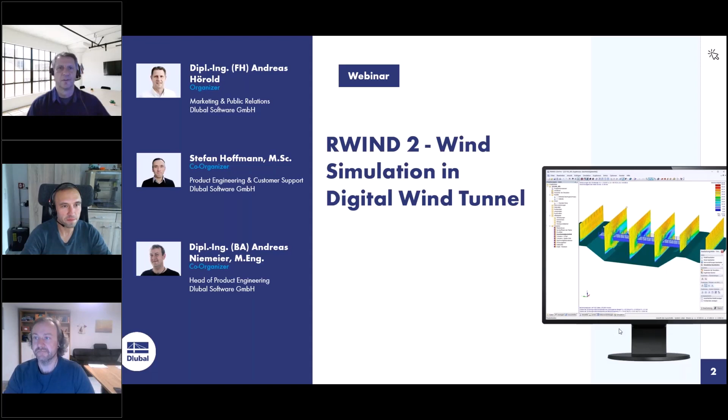Okay. There were some interruptions, but we could hear you. Okay, then we can switch off our webcams so that the attendees can see the full screen.

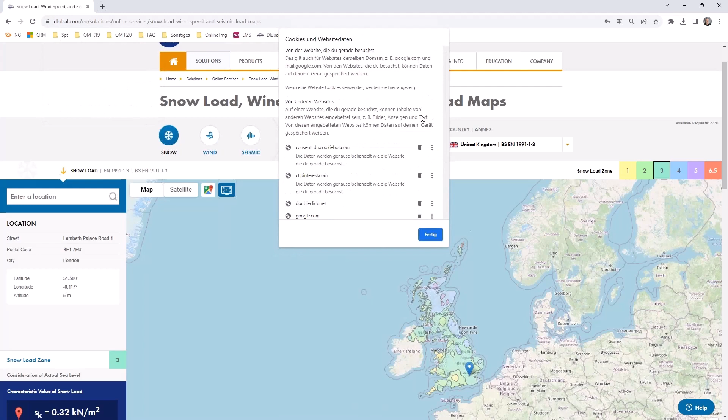So this is of course some data which is saved on the computer to quickly access a page, but it might be necessary to reload it. And then you can select if you want to allow all cookies again. And then the frame should load again for you if it did not do before.

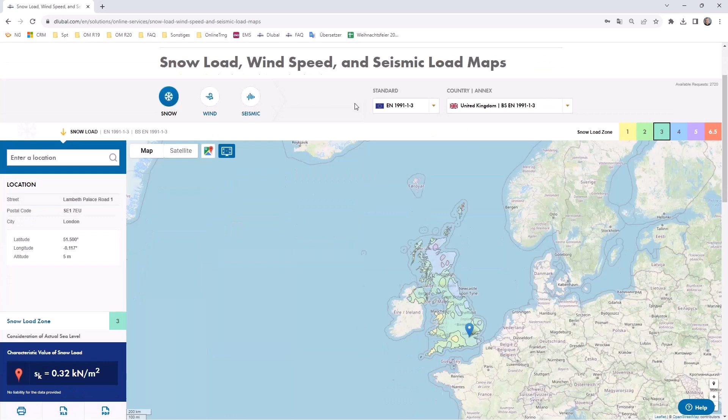So let me quickly sign in so that I will have enough requests for today. And let's go again to the snow load map. So I think you're already coming to it. So it is not available yet for every map. So I do not think that it is available for Great Britain. Oh, it is already. In my tests, it was not available. Okay, so we can use, for example, Great Britain with the Eurocode 1991-1-4.

And then you see the small button on the left bottom of the page, which is of course still announced as being a beta. So please double check the values if they are correct or not. You can of course do that in RFEM, or at least be suspicious if they might be correct. It's still in a beta mode, but we do not want to not present it. So you can think about using them.

So if you once click on the button, you can already see the three diagrams you can now gain. So it's not only about the basic wind speed. No, you directly jump into the map and parameters according to the Eurocode, and it will create the diagram over a certain structure height. So if you would adjust it over 20 meters in here, you would see that the diagram will of course be adjusted. And you can of course as well jump into the wind profile tab in order to copy paste the values with the level.

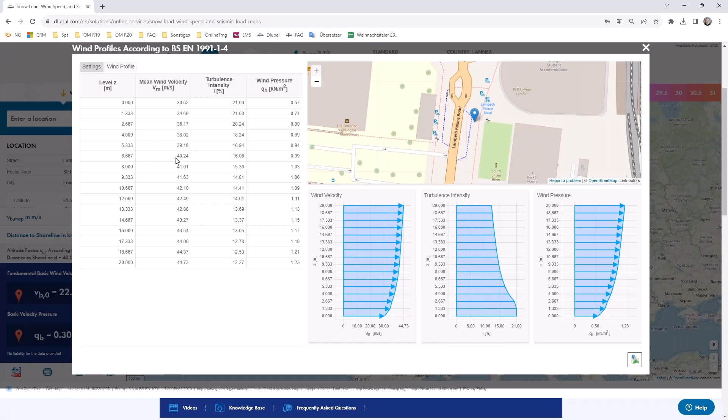What is then of course necessary if you jump into the RWIND main program for the definition of the wind profile and turbulence intensity profile. You can as well choose that you want to have a user-defined definition and adjust all the values you see in here. You also get a closer look on the place where you are. You can also switch off the map if you rather want only a big display of the diagrams.

So just once to remind you again, it's still in a beta phase, so it might not be available for every standard we provide, but this might be quite useful for you if you use RWIND without RFEM 6, or if you want to compare your hand calculations, or if you want to compare our calculations and tell us something might be wrong or not.

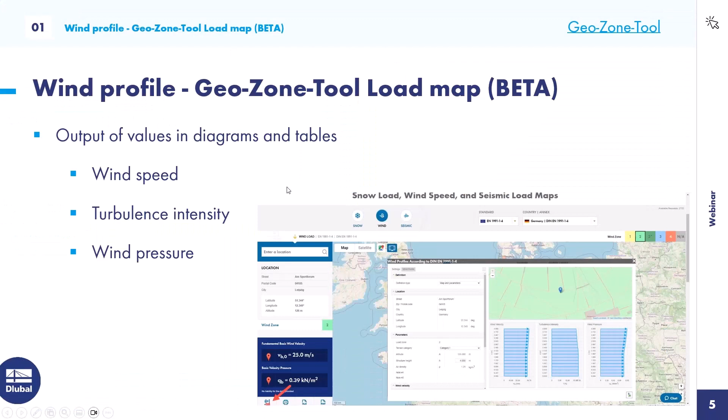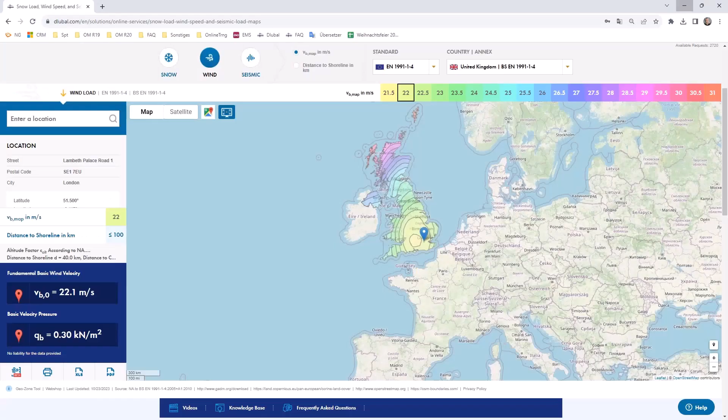So this was something not directly linked to RWIND. So let's now jump into the main part, of course, our program RWIND. And this is my summary of the 4 features I would like to mention. Maybe you are not yet used to it, but you can also find all the data in our extranet. So if you log in with your account and you go into the development tab on this page, you can see features and also bugs. And this is most likely the place where you can inform yourself of what is new or what was fixed.

And if you then restrict it to RWIND, this is in German, depending on the language which is set in your account, you can see that these features were introduced into the 4th version or the 3rd version and so on. And you could also check the bugs which were fixed for the certain files.

So what I would like to talk about now is the first feature, the generation of zones from RFEM surface numbers. The next one will be the support for verification or experimental data. This will be the main part of today's webinar. The next one is a new scaling function for the wind tunnel optimization. And last but not least, we will quickly step into the display of maximum and minimum values in each time step. I have, of course, one slide for each feature, and then we jump into a small file in order to check where you can find it.

So you are now able to generate zones directly from RFEM surface numbers. Of course, only if you use RFEM 6 and then hand over the model to RWIND. We will now also hand over the surface numbering, and then you are able in the edit part of RWIND to generate zones from surface numbers. So each surface, which you can of course split as much as you want in the RFEM main model, will create a zone.

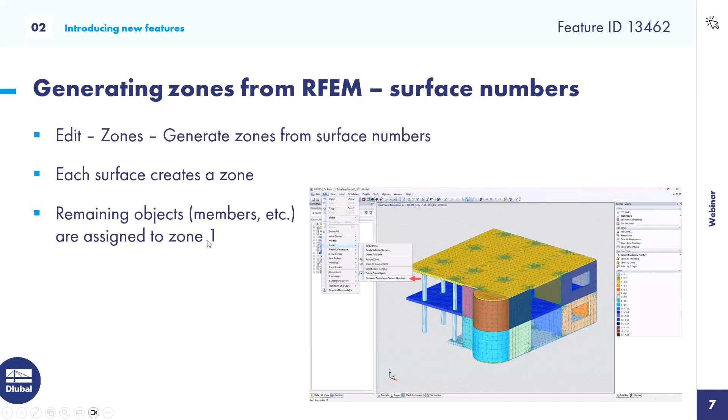And remaining objects, so you may of course also hand over members, they will also have triangles. They will be assigned to zone 1. So of course that's a bit of a complication that they are assigned to zone 1.

But if we now step into my example file, what is also installed, it's the concrete building where I switched on the surface numbers. You can see that we have a surface number 1. And if you do not want that 1 also includes the member triangles, you just have to once go into the table and insert a row. So the surfaces will not start with 1, and all other things should be synchronized in the back.

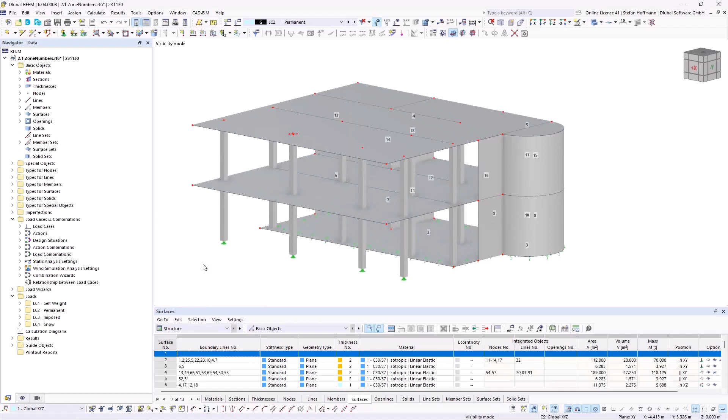And now we have only surface numbers starting by 2, and all other stuff may be handed over to zone 1. If this is not fine enough for your difference, we will also see it in the main example later on. You might also right-click and divide surfaces with intersecting lines in order to create multiple or more zones.

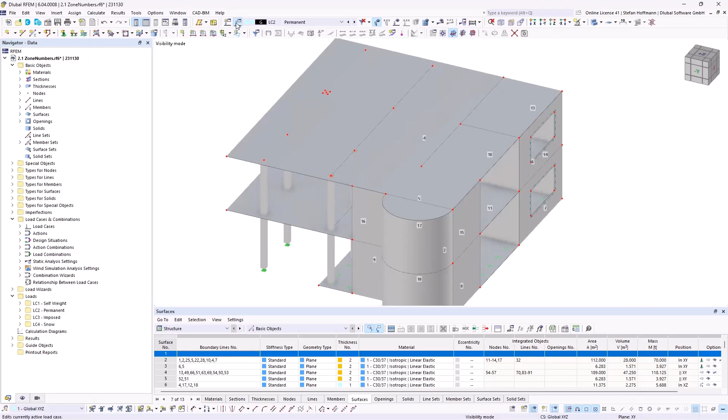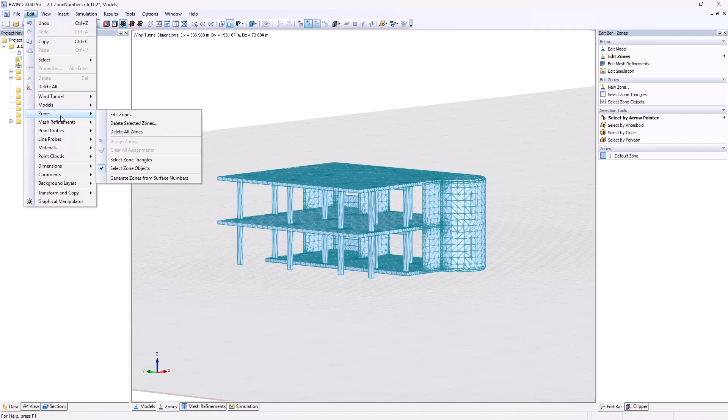So let's quickly create an example wind simulation load case. We will not care about any settings that are necessary to be taken. We will just open our model in RWIND, which can be quickly done by the button I used. So our geometry is handed over, and now there would be only one default zone. So it is possible for you now to hit Edit, Zones, and generate zones from surface numbers.

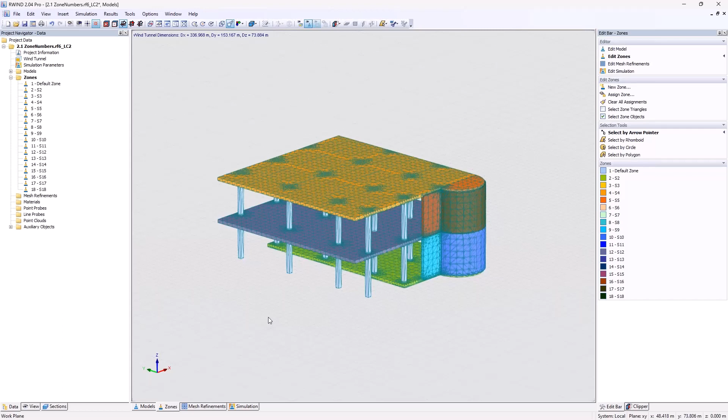So you quickly see that there are now a lot of zones created, and you do not have to do that manually. So you don't have to create a new zone and use the selection tools to gather all the triangles which might be necessary for your file. No, if you already consider the surface numbers or a certain division in RFEM 6, you can already directly create these zones in order to quickly evaluate maybe normalized pressure over a certain zone.

I will later on show you how we will use it on our monopitch roof. And as told, you can see that there's of course also the default zone number 1, where you will then be able to find every other stuff which is not related to a surface number. Okay, so this was the first feature I wanted to talk about. We will use it later on in the next example. So let's close everything, go back to my presentation.

So the next one is the support for verification and experimental data. So we now offer you the possibility to enter verification data into the table. This is yet linked to point probes and pressure values that you can enter. And you can then display the data in graphs using labels, so the normal point probe labels. But you can also do a graphical representation of the differences between the verification data and the simulation results. You can switch that in the result navigator.

You can also choose the extrapolation of the data on the surfaces in RWIND using 2 methods, which are explained in the manual. And you can also restrict the verification data to be extrapolated to a certain zone. And we will later on use that, of course, in my main model.

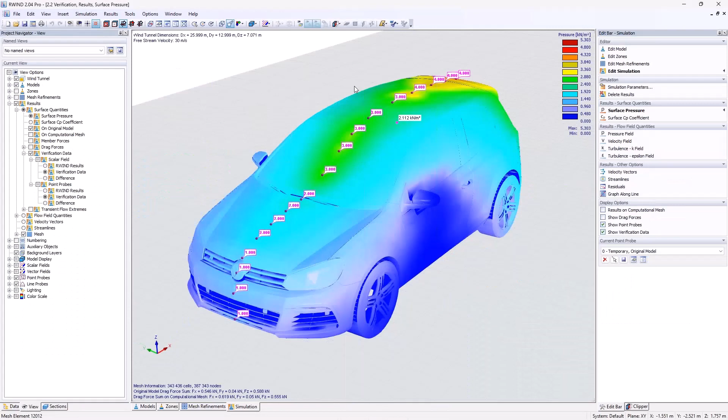But in order to introduce the verification data first, I use the Volkswagen Golf, which is an example installed already if you install RWIND. And then I have already defined a point probe. I activated the option for the point probe. It might be, of course, a bunch of probes you want to enter if you want to define certain values for zones. We now only did 1 point probe.

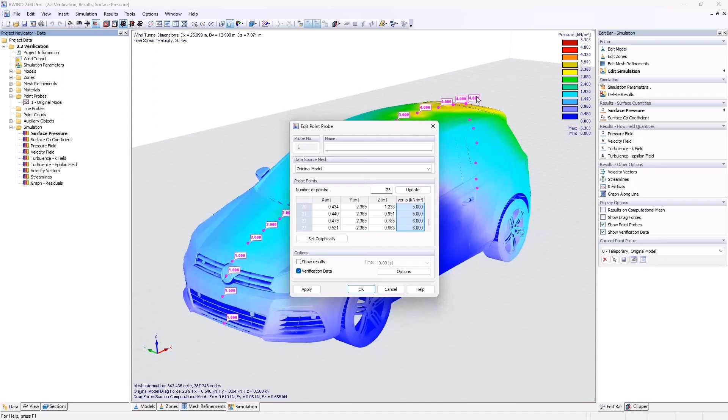And if you activate the verification data, you will get one more table over here where I have entered random values. So they do not come from any tests. I just wanted to show you the labels so that you can quickly estimate where they are and what they are doing. So then you will also be able to adjust the verification data options.

So you can choose the interpolation method, which is yet fixed to all point probes. So you cannot yet differ between Gaussian interpolation or diffusion, but you may set a different data range constraint for certain zones. We will see that later on in the other example. So if you do not know about Gaussian interpolation or diffusion, you can just hit F1 on the keyboard. And usually it should be linked, but maybe we did not yet do this.

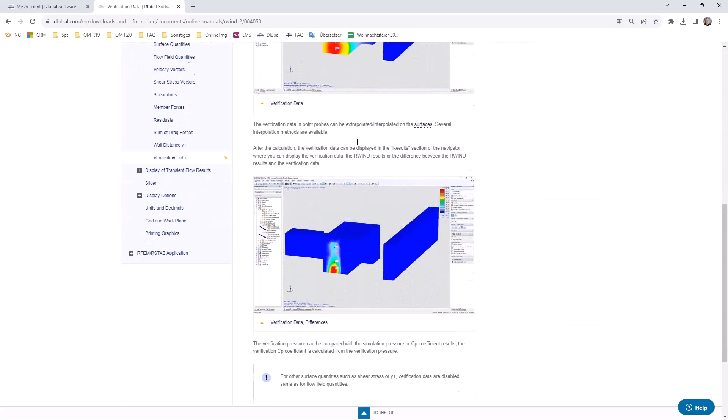So you can quickly, of course, search for verification, wait some seconds, do not wonder if you do not need to hit enter, and then choose the topic, which may be about verification data. So there is some general part of it. And if you go into the probes, we quickly search it, then you can see the explanation about both interpolation methods. So just scroll down and then you will find the information about the second interpolation method, or I think also about the other ones.

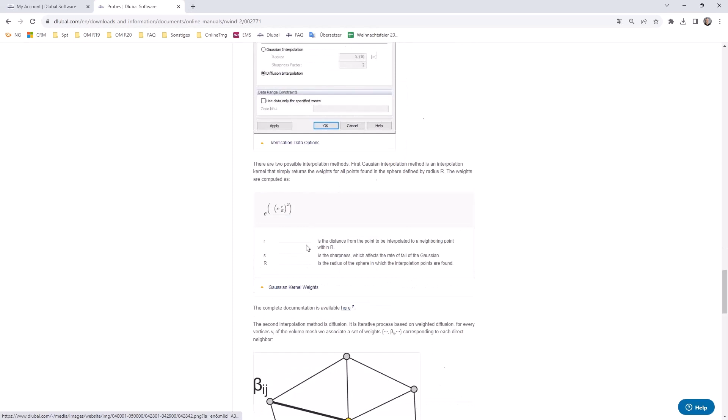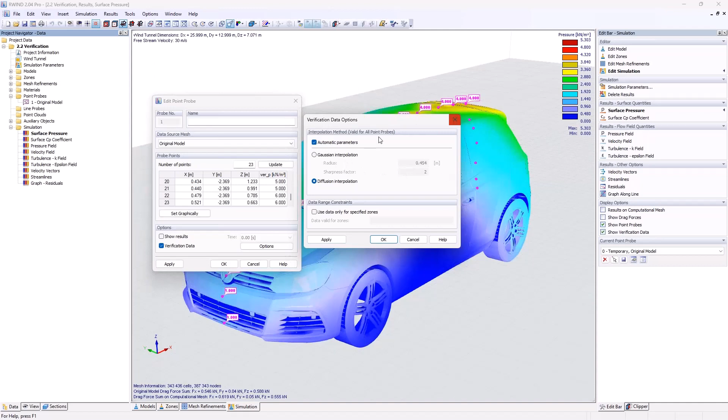Yeah, so we will not go into the theory behind it now. You can double check it if you are interested later on. What I do remember by myself is that this will most likely diffuse interpolate about a whole area in slides. And with the Gaussian, you can set a radius which will interpolate, but we will once again, of course, later on show that.

And if you have these results, you can always differ between the verification data of the scalar fields and the point probes. So you can step over and show the results you get from the numerical wind tunnel analysis. And then you can, of course, also switch to the verification data. And I think the biggest influence will be the difference. So you can directly check according to the colors how far our calculation maybe is away from the standard, which does not really mean that it must be far away from the reality.

So there's, of course, always the question, how can we verify our model? So from my proposal, every FEA analysis or also CFD analysis needs to be, of course, verified by a wind tunnel experiment. And then you can enter the data and check if the assumptions you make in this complex CFD analysis match with reality. All right, so we will later on use that feature, of course, once again.

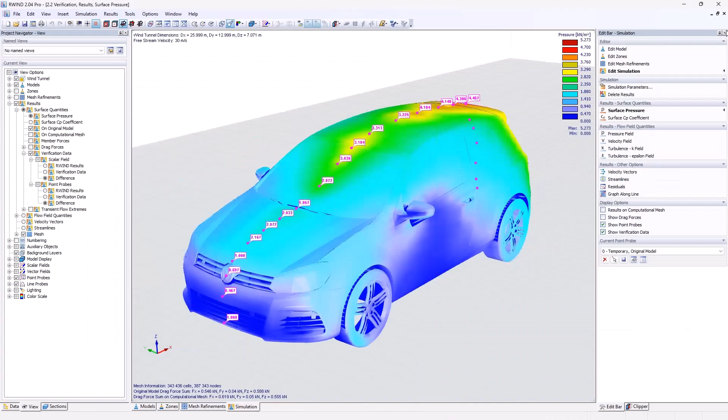So the next part is the new scaling function for the wind tunnel optimization. So you are now able to define scaling factors to automatically adjust the dimensions of the tunnel, and you will be able to save the user-defined scaling factors. So let's quickly jump into the example, which is once again the Volkswagen Golf car. And then you usually double click on the wind tunnel. So let's zoom out a bit maybe, and see these automatically adjusted values.

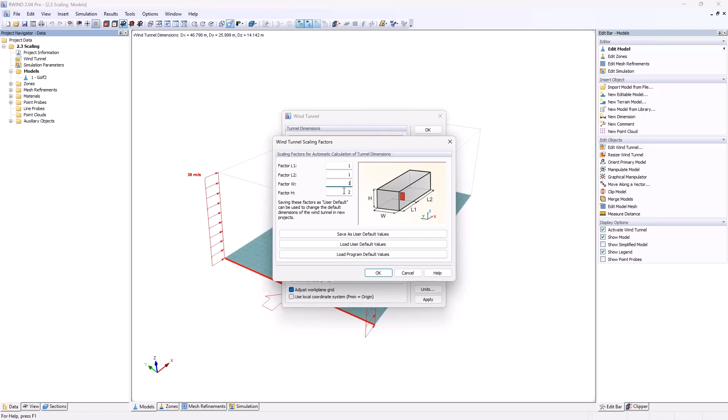And then there is a button of the scaling factors where you can now define your own values. Usually it is like this. So it is multiplied then with the normal values you have in the program. So this is the wind tunnel the program will offer you. But we propose most likely, if it's going into a more detailed calculation, a recommended wind tunnel size.

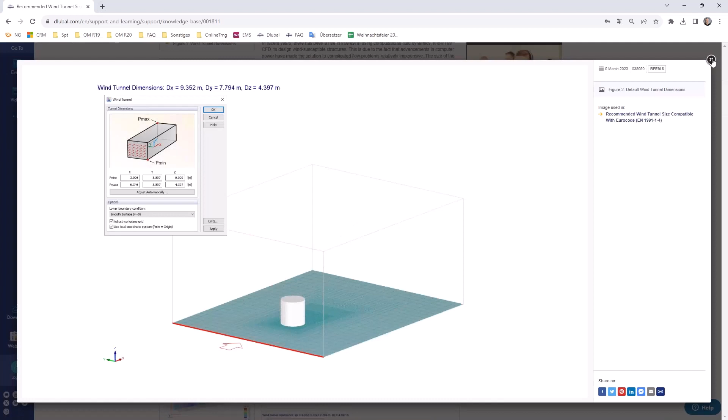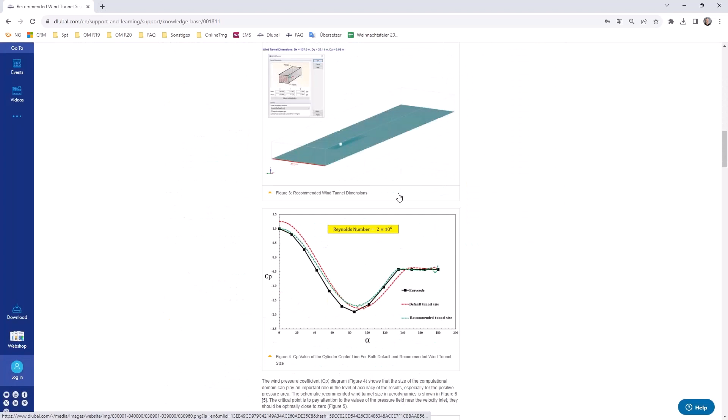I did already once mention this technical article by Mr. Kazemian in a different webinar, but I would like to once again put some effort into it, that it is quite necessary to think about the dimensions. So if you compare the standard dimensions to have a quick estimate of the wind load pressure and the size we would recommend, which is of course then extending the calculation time a lot, if you want to compare values to the Eurocode, you can see that the size will be much bigger. And I did, of course, a quick estimation of what the values should then look like.

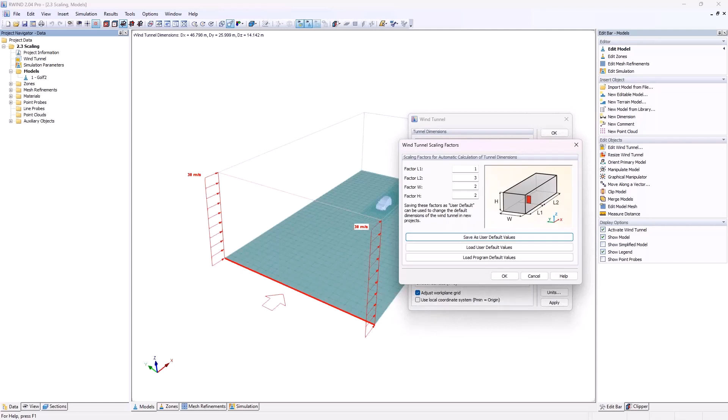So if you would like to match the technical article, I do not like numbers with comma, so it would be 2.7 in this length, 1.6 in this direction, and 1.85 in this direction. I would use 1, 3, 2, and 2, hit OK. Then you will be informed that these are just the factors used, and you have to use, of course, the adjust automatically button once. If you then hit OK, you can see, well, it did not change a lot because I think it was already bigger in front.

But then your wind tunnel will be adjusted according to the factors you enter in here. So if you put 10 inside it, say OK, and adjust it, then you can see that this factor is going to be increased a lot. And then this will offer you the possibility to not think a lot about meter values, but to quickly enter the factors you would like to use, save them, load them, and apply them on your model.

So the last feature I would like to present today is the display of the maximum and minimum values in each time step. So this means it is for the transient calculation, limited to our RWIND 2 Pro version. And it will offer you to have some kind of envelope for surface pressure or CP coefficient values.

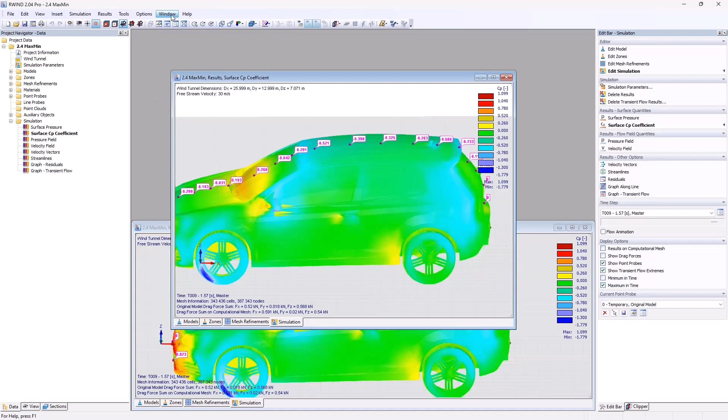So let's jump once again to the golf car. There's also a transient calculation file for the golf car. So usually if you show the transient flow results, you will have a slider over the time where we can see, most likely on the back part of the car, that the pressure will of course change over time due to the wind acting turbulently. And then it would be kind of hard to evaluate where will be the maximum suction or the maximum pressure.

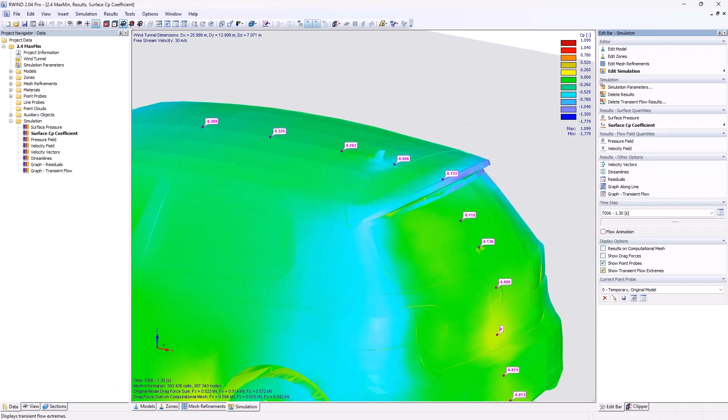Or if you are lazy and you don't want to check that, you will now be offered to show the transient flow extremes. And if we use 2 monitors, we can show the minimum in time, which might be minus 0.814. So it's of course the minimum with a minus. And we can then also choose to show the maximum in time.

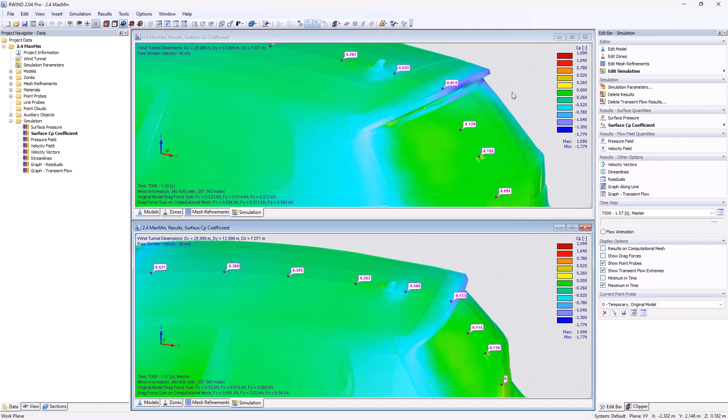So this same point probe would be, in a transient calculation over time, gaining the values of minus 0.733 or minus 0.814. So this is one way to determine the maximum or minimum values for your structure or your file. You can, of course, also switch that value in the view navigator, but I think the quickest way is, of course, to do it on the right.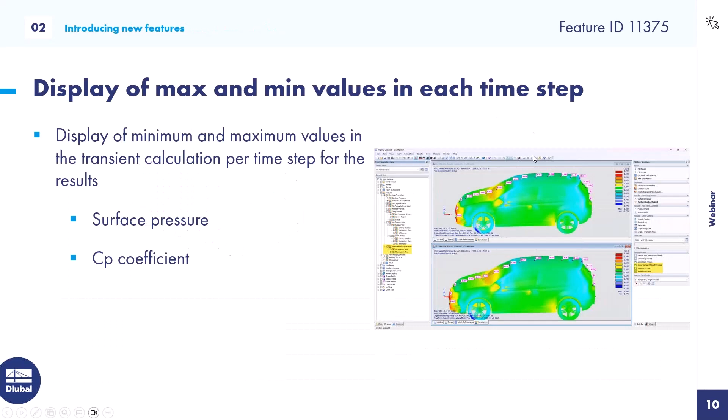Okay, so this was kind of a slide presentation, but was also stepping into the program. And now I would like to show you how we can use the feature of the verification data on an example. So it's a building, it's 10 meters long, 8 meters wide, 4 meters high, and it has a roof angle of about 5 degrees. So it's a monopitch roof. And we will apply the zones for a monopitch roof.

If the wind is going into the main X direction, there will be 3 zones: the F zone, G zone, and H zone according to the Eurocode. And it will be divided into these parts. So we will use the generate zone function in our model, and we should get these zone dimensions. I have taken them from the wind load assistant because this is a known example type of roof for the Eurocode, and it is supposed to have these pressures on the certain zones.

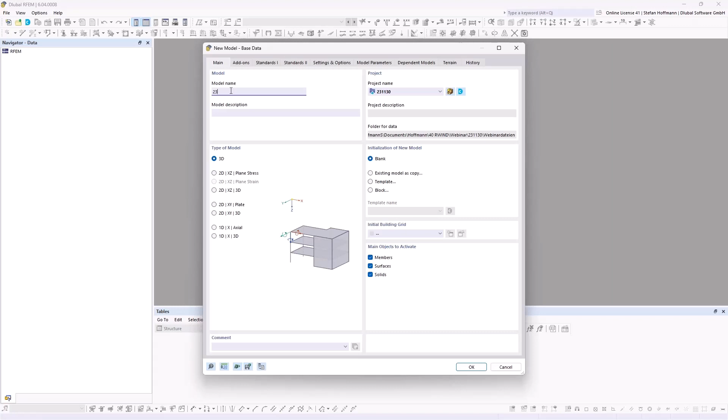So we will start with a fresh model in RFEM 6. So let's give it a name. It's the name of today, and it's called monopitch. We will not do any design of elements. It's really just about giving our model to the wind simulation analysis and gaining the pressures. So I will only activate wind simulation. I could activate all because I'm working for Dlubal, so I'm not limited to any add-on.

And we will do it according to the German national annex, because we are quite used to doing so, and we also tend to present our English webinar for the German annex. What you can also do now is choose a location in the Geo-Zone tool if you want to. We will do that later on. And you could also define a terrain. Just remember, it is possible, but since we would not like to have any influence by neighborhood or by the terrain, we just skip that.

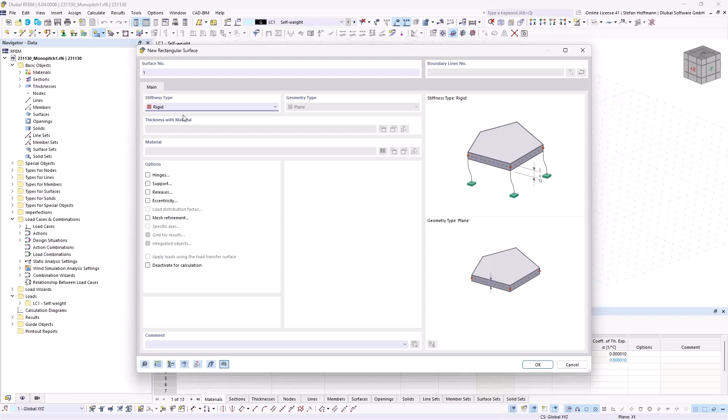So once the file is loaded with all the data, remember that the first angle of wind simulation load is going into the global X direction. So I tend to rotate my model because I dislike rotating the wind load. And I will now start by modeling the bottom plate. I will simply use the rigid type, because I'm only interested in the wind load on the structure, not in any design yet. So it does not matter if it's concrete or metal. We can just use rigid because I do not account for any stiffness.

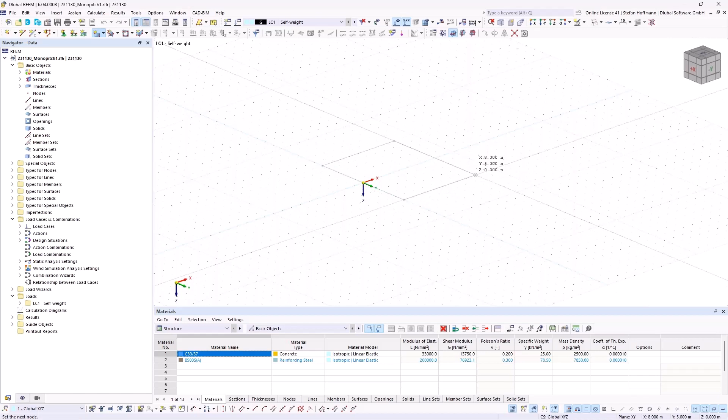So I said that it is 10 meters times 8 meters. So we now need to define this size in our program. So where did I choose it? I'm starting at minus 5, and we're going to 5 and 8. So this will be the bottom plate.

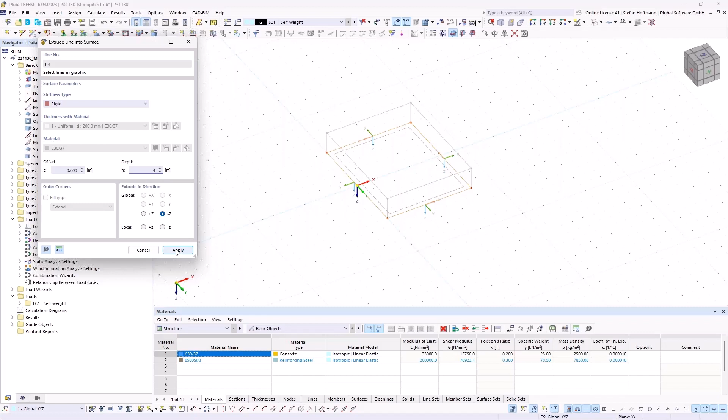Then we can simply, with the control key on the keyboard, mark all the lines, right click on them, and extrude them into surfaces. This will offer you the possibility to quickly model a surface. We will once again use the rigid type, and the height should be 4 meters into minus z. We apply that, so we most likely have already our hull.

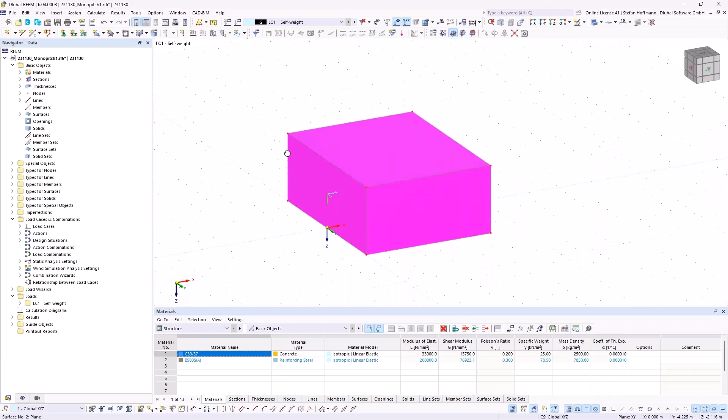You can, of course, switch into this display if you like it even more. Then I would just mark my bottom surface and copy paste it with the control keyboard and snap it to the top. We, of course, need some boundary conditions at least, so I would just apply some line supports, being some singular foundation on the length. And then it's, of course, about defining the angle.

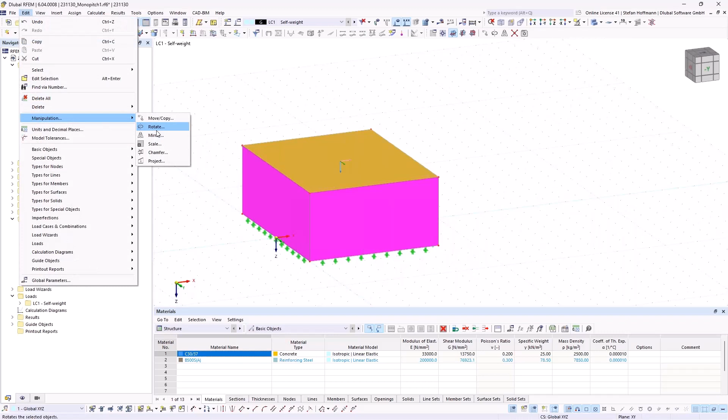You can quickly do that by simply hitting the surface and using the manipulation tool to rotate it. So you can now decide that you want to rotate it, for example, 5 degrees. Due to our wind load assistant, I use 5.01. And then we need, of course, to think about what will be the direction.

So it is about our y-axis. This is the turning point, and it should be into the z direction, so we want to have it into the global z direction. Since we use this point already, you don't need to choose it, but we can, of course, once choose a node in here. And if we hit OK, it is moved. Since I only selected the surface, all other combined elements are not moved.

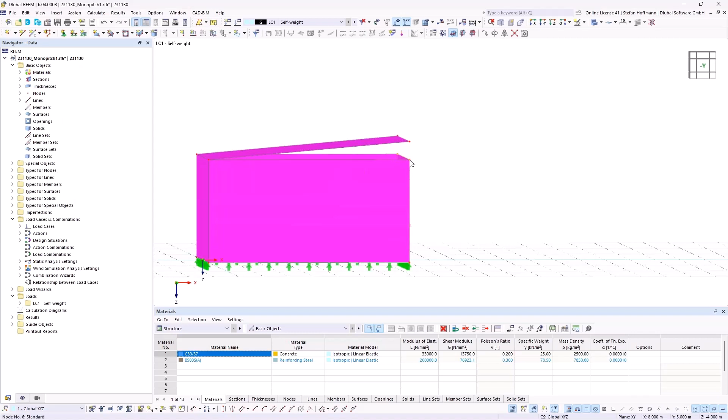So we could simply mark everything before, or we now just mark both nodes and drag and drop them to this position. Then you can see that the surfaces are quickly adjusted. It's quite smart. If you would like to model close to a CAD design, I think you can use drag and drop and so on.

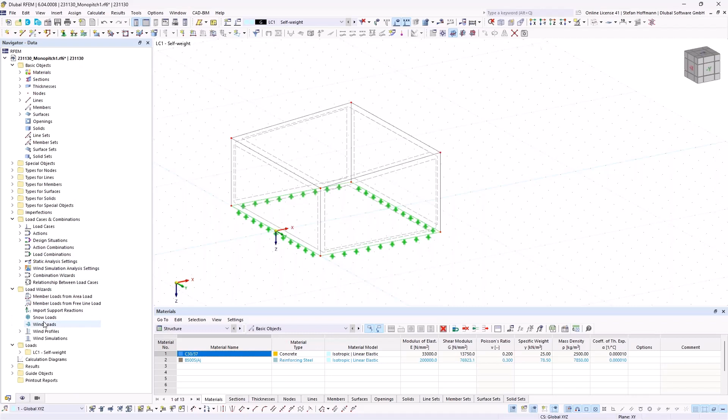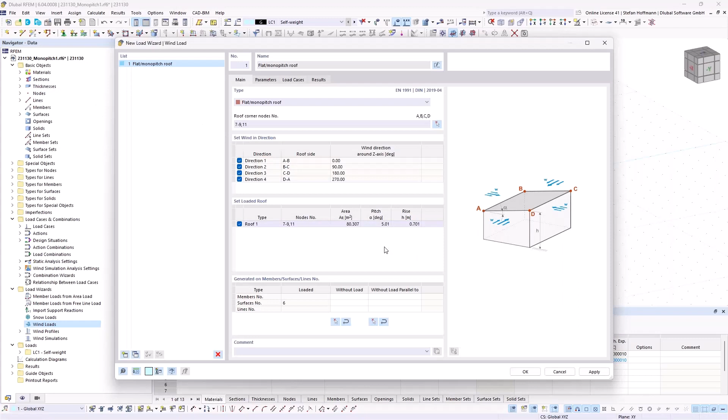And then you see the picture, what 4 corner nodes you need to choose. So we simply pick our 4 corner nodes and hit OK. And then we introduce the parameters.

So now I hit the button to jump into the Geo-Zone tool, and I will use the location of Leipzig. It does not matter where we are. You can see that the German standard will choose the wind zone 2. I will load all the data. It will gather all information from the Geo-Zone tool, so we do not need to enter it manually.

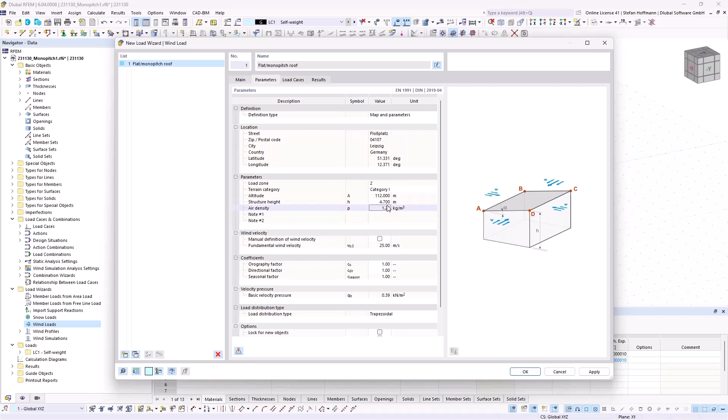And then I can adjust the structure height, which is roughly 4.7 meters, and we will use terrain category 2. If we do that and create all the wind load cases, we can quickly estimate the results already. So you see the load directions and you see that our zones will be split.

So if we jump quickly back into this part, we will be given all the data that the standard will give us. So the width of zone F, so E divided by 4, is 2.35 meters, and E divided by 10 is 94 centimeters. So you will be given this information.

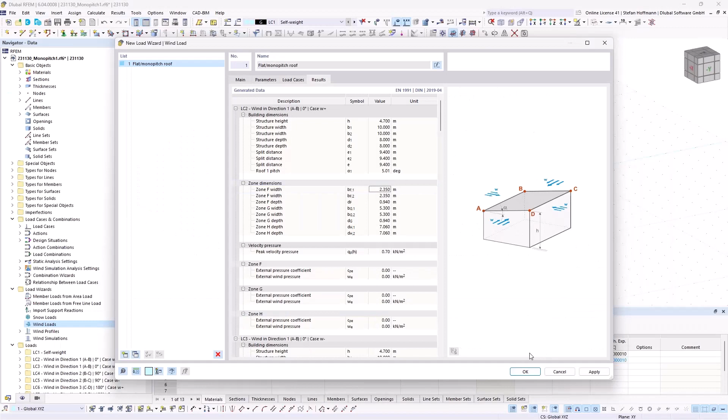This is why we do it as well shortly with the load assistant. And if you display it, you can see that this is the load, or the suction, we are going to experience in our wind, and we will then check it.

So let's continue. What we now want to do is define our zones, so we would like to split the roof into parts. For that, we would like to have our lines showing into the same direction. So now we can use both lines, hit the right mouse button, and divide the line via distance.

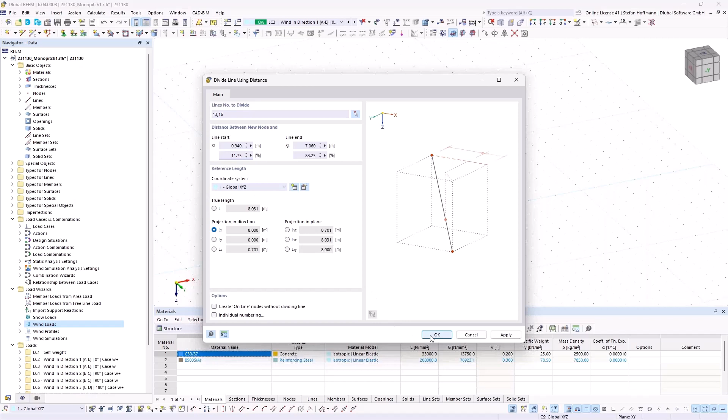So now we could just simply enter 94 centimeters, but it is meant as a projection showing from top. So you are now able, of course, also to use the projection of the line into the global X direction. You can enter 94 centimeters in here, and if you do that and hit OK, you can quickly divide the line using it for further modeling.

We will now simply draw a line into here and have the line which is going through, and then I told that the distance will be 2.35 meters.

So we will use this line and also divide it with a distance. It's not about the projection or anything, since it's the same if we use it, and split the line at 2.35 meters. We will also divide the line at the distance at the end, 2.35 meters. Okay, so now we can simply mark this node and copy it from this point to this point.

Or you can, of course, also try to hit the tool in order to snap the perpendicular part. I'm not sure if I activated it. So I just simply use, for example, also this line and copy paste it over here.

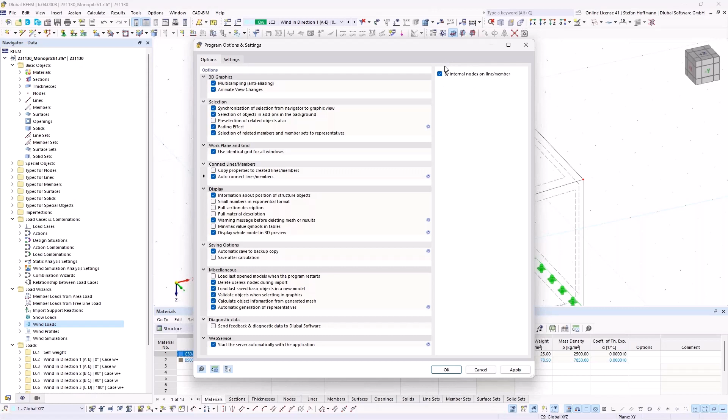If you are curious why maybe there are red nodes or blue nodes created, so if the line divides or not, you can step into the program options and choose the setting for what it is supposed to connect, members or lines. If you do not manage to do so, you can simply later on use this function and check if the lines will be divided.

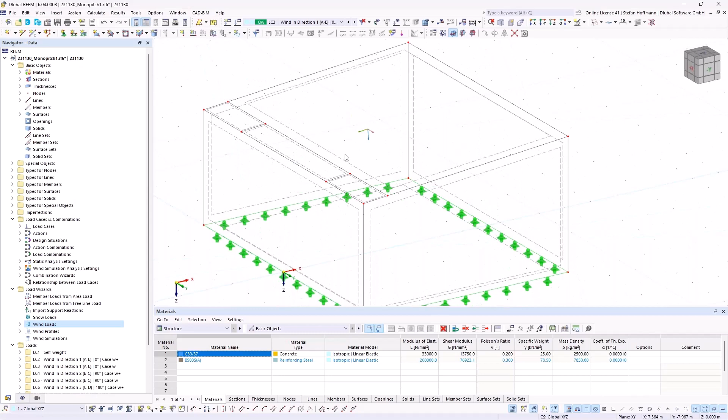So the last part we need to do in order to have certain surfaces is to right-click on the roof and divide the surface with intersecting lines. And voila, we now have 4 surfaces for the top, which will give us 4 zones as expected, and what we would like to do in order to compare it with our experimental data.

So this is one possible way to do it. If you have a quicker one, of course, you can also use your own way of modeling.

Next, for the wind analysis, we need to step into the mesh settings in order to check what wind simulation options we would like to use. So you can think about the level of detail or the simplification of the model, and whether only visible objects should be handed over.

Since we do not have members, we can just deactivate this option. We will also not hand over any terrain, and we will also not hand over any surrounding models.

Let me shortly drink something.

And we will also not keep the wind simulation results. Since we use rigid surfaces, we do not need to think about surface thickness. Running RWIND in silent mode is mainly supposed for when you have a lot of load cases and do not want to double check them or manually start the calculation in RWIND.

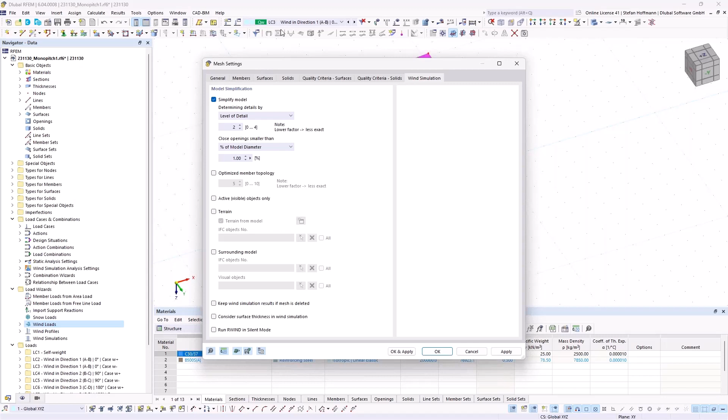You can disable this button, and once you calculate a wind load case, RWIND will open and you will be given the option to adjust everything you would like, so you can double check the model and then start the wind calculation on your own.

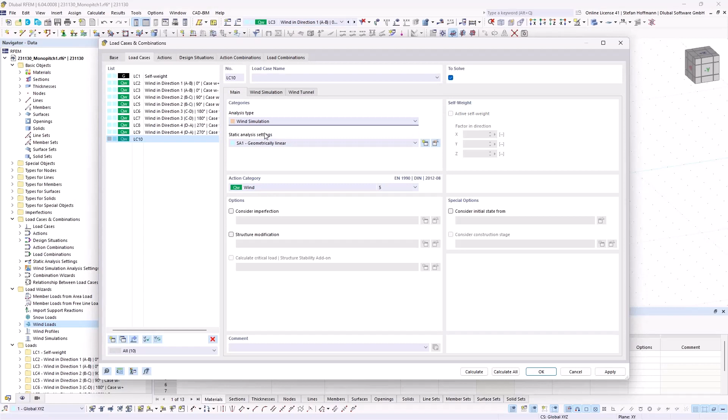The next part is that we need a new load case, of course. So it will be the action category wind. It has to be the analysis type wind simulation. And then two registers will open on top.

There you can choose further settings for the wind simulation. So the first one would be the wind profile. If we step into it, you can see that this is, of course, once again related to a certain destination.

So we once again check Leipzig in order to load the data inside it. You can also manually define it if you want to. We would just change to category 2. The height is taken automatically by the program. We will not adjust any other factor inside this, and there you can already see the profile, which should match with the ones I showed in the beta phase.

But due to the beta phase, there might be still some adjustments. Using this button, you can switch between the turbulence and the wind profile, or you could also see the wind velocity given in the tables.

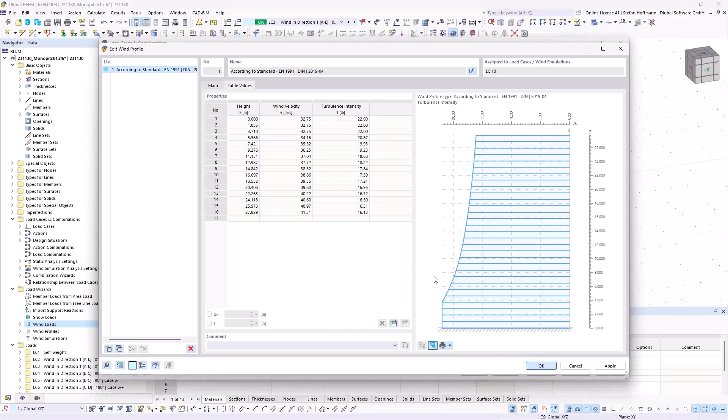Once we defined it, the last part would be to double check the wind simulation analysis settings. So whether you would like to do a basic steady flow calculation or a pro transient flow calculation, this is always up to the structure and turbulence you are expecting. We will simply do a steady flow calculation.

We will use the presets given over here. And if it is up to certain controlling standards, we would propose to also activate the boundary layers. But for this, please check out our technical articles, because Mr...

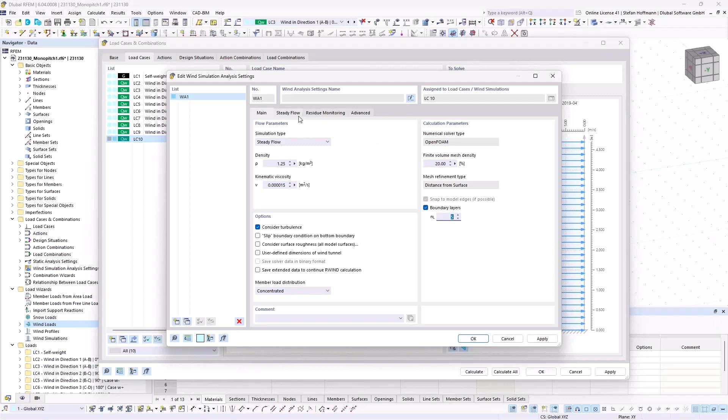There are other things you could adjust, but we will just leave it as it is. So if we now hit OK and start the calculation of LC10, you will see that it will hand over our model to RWIND. It will start RWIND, and we would now be able to do the stuff we'd like to do.

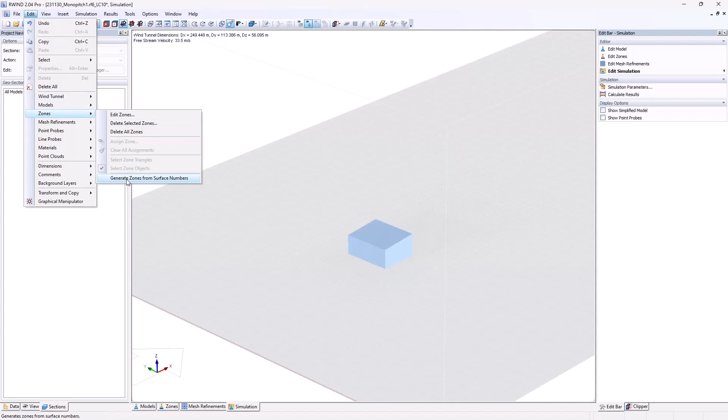So currently it would be necessary to manually generate a zone from surface numbers that you can later use. Of course, we are planning that there should be an automatic option, because usually you would like to automatically create zones.

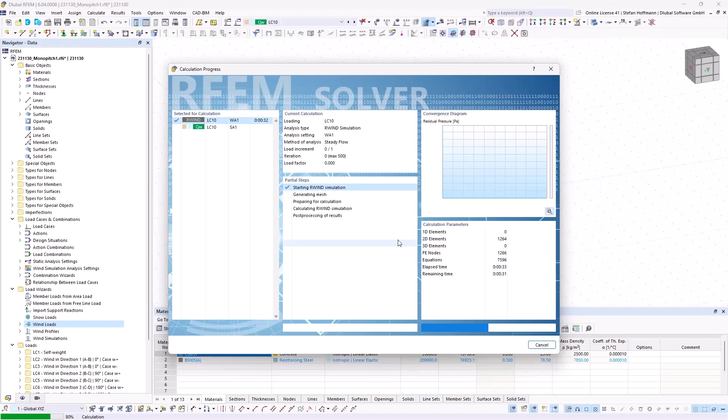If everything is done, we could now start the calculation, but since this will take 5 to 10 minutes even for this file, I will not do it now. I will open my already calculated file. Of course, RFEM will give me some error, since I already ran the file for you.

So let's make a jump in time. 10 minutes passed, and we now already have our results on the model. Let me quickly delete the line probe I already defined here. So we already have our zones defined.

Our zone, I always have to double check: Zone 7 is the big part H, 8 and 9 is F, and 10 is G. I hope I will remember it - if not, I'll have to double check it again.

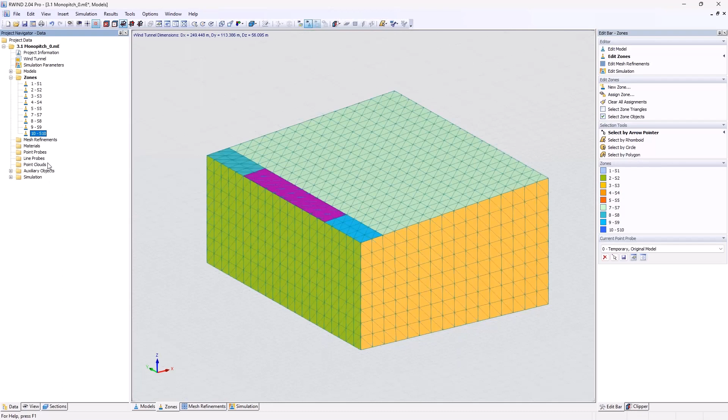So what we are given now after the calculation is, of course, the pressure for our front and our roof, sides, and so on with the certain values. And now if you would like to compare that to different standards or to your own analysis, we will define a new probe.

I will name it F for the zone F. So this will be these small parts in our model. And then we will define it on the original model, sorry - not the simplified model.

So the original model - if you are curious about what the model meshes are about, there is a big chapter in our online manual, because this is one main part of RWIND: that we give maybe a non-topologically correct model into RFEM, to RWIND. It will create a fine mesh for the CFD analysis and transfer the forces back onto the model.

So let's start by setting point probes graphically. We are now only interested in the roof, the part F. I will use 2 probes over here - you will see them soon.

I hit finish, and then I will quickly switch to the RWIND results, because it was still set that we show the verification data. And then we can see that we have those 2 point probes giving the results at this point for our zone.

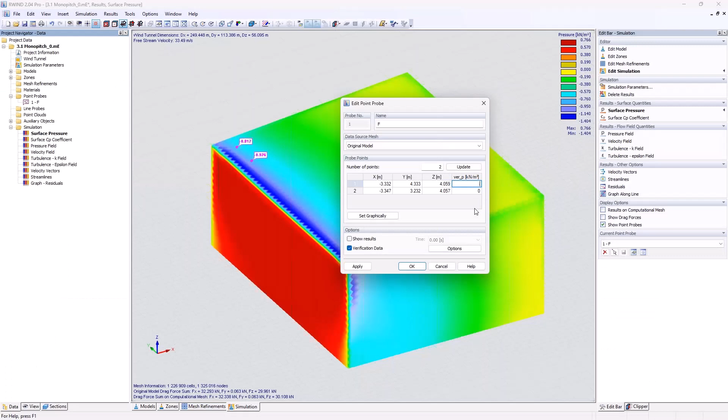And if we now would like to introduce verification data, we just apply this button and we will check what the standard is thinking of. So it's minus 1.19 kilonewton per square meter. So let's enter minus 1.19.

And quickly check that this will only be used now for zone number 8. And let's use the diffusion interpolation, say OK, and let's quickly switch the data to the verification data, because I think this is a smart way to see what the logic is doing behind it if you enter these probes.

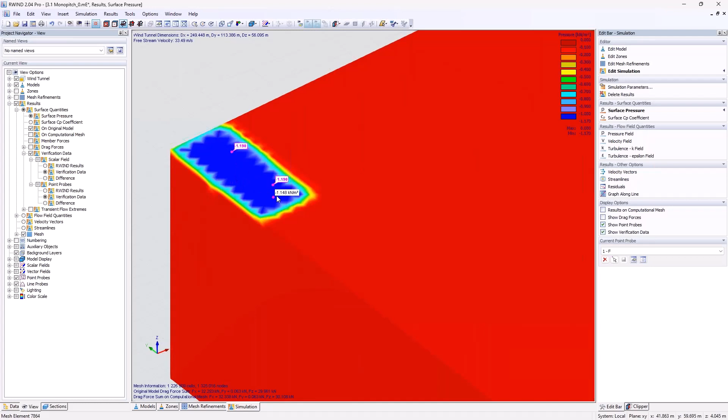We now inserted 2 probes for the zone. We restricted it to be only interpolated in this area. So what it tries to do is keep the minus 1.19, and toward the boundaries, toward the other surfaces, it tries to interpolate.

We will now introduce some more points. So I will enter 1 more in the other area, say OK. We go in there - it already has the latest value.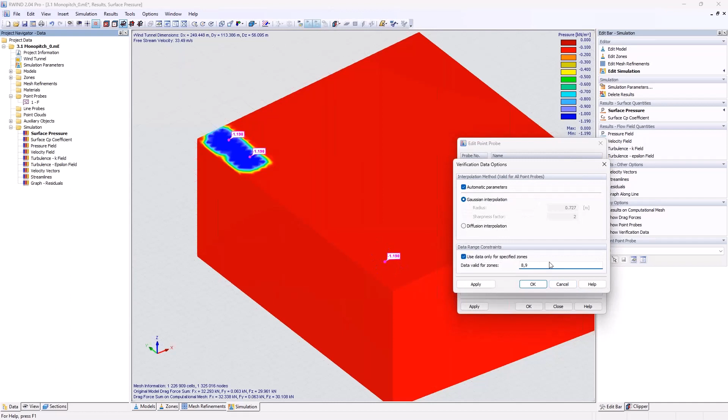We can also restrict it to 8 and 9, and then we see that the interpolation is done in a bit different way compared to the diffusion. So diffusion uses a wider area, while Gaussian uses the automatic parameter defined here.

So it's a radius around the dot of 72.7 centimeters. We could also uncheck the box and increase the area or decrease the area. So it depends on how many probes you would like to set. So in a normal wind tunnel analysis, in reality, you have a certain amount of probes over the height.

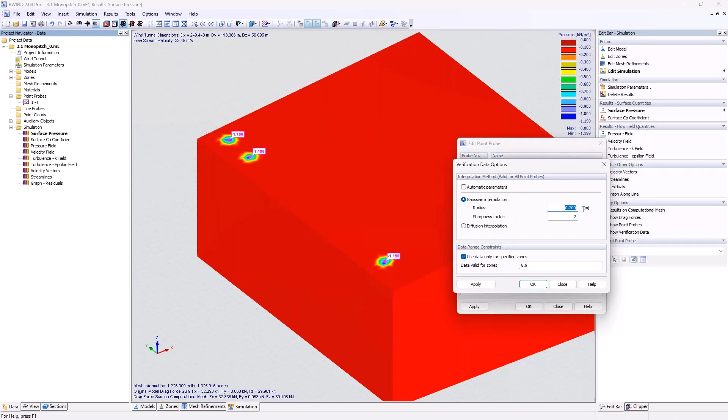Since this would most likely extend my webinar by more hours to introduce such an amount of probes, we will only use 1 probe this time, and we will simply increase the radius, for example, to 3 meters, because this way most of the zone will be covered by my defined verification data, and all the other stuff will then later on be interpolated. So we will set a new probe for the next area.

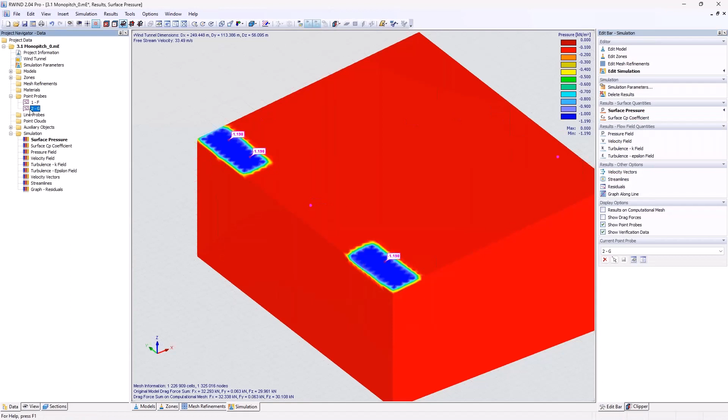So this would be G. We will set it graphically. So we will once again only use 1 dot. It will be more usually. So I set 2 by mistake. So let's only keep the first one we used. You can also later on adjust the values we used in here if you need to do so.

And we will now once again define the verification data for this part. So let's jump back. It should be minus 0.84 according to the standard. So let's enter it. And as you can see, this part on top is limited for all probes, and we will define this probe only for part number 10. And then you can see that it will also interpolate between the zones a bit better than it was doing before. So now we have already defined 2 parts.

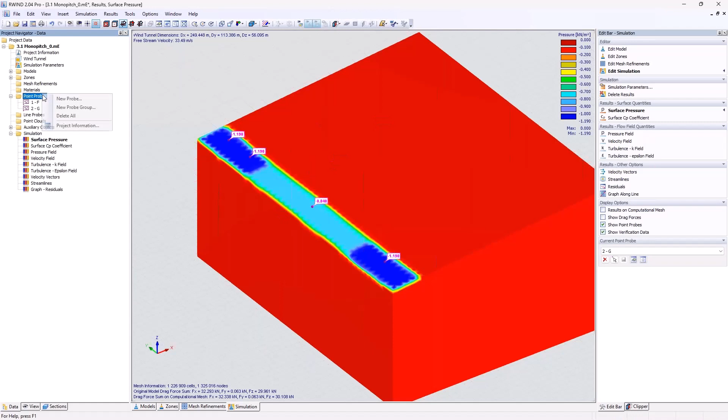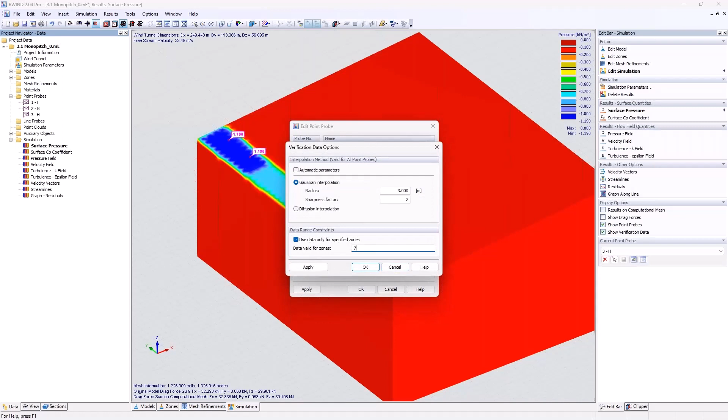So let's enter our last probe, which would be for the H area. Once again, I only set 1 probe over there. We define the verification data, which is supposed to be minus 0.42, sorry. And we assign it only for zone number 7. If we hit apply, we can see that our radius, since the zone is about 7 meters and 10 meters, is way too low, but it does not matter. We can, of course, increase the factor over here, for example, to 6, for our example, to extrapolate our value to the whole zone.

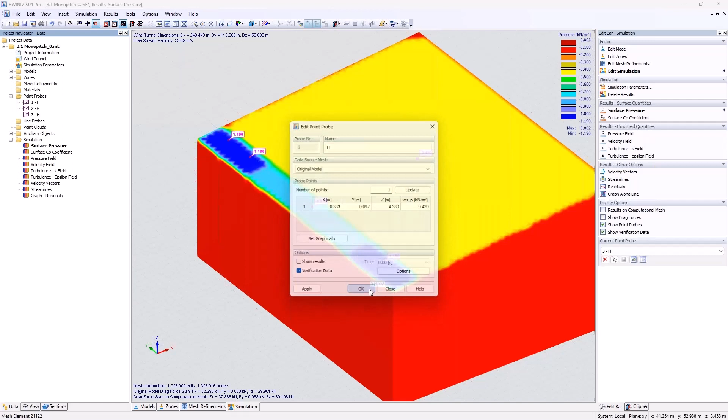So if we did that, we now have a smooth graphical representation according to the values. Of course, the standard is offering you, I think, some summed up values for the zones. So you would only have yellow, blue, and light blue for the zones, which might, of course, differ from the real values we achieve. And now we can go into the View tab and say, okay, these are our RWIND results. You can see the probes also show the values RWIND is giving us.

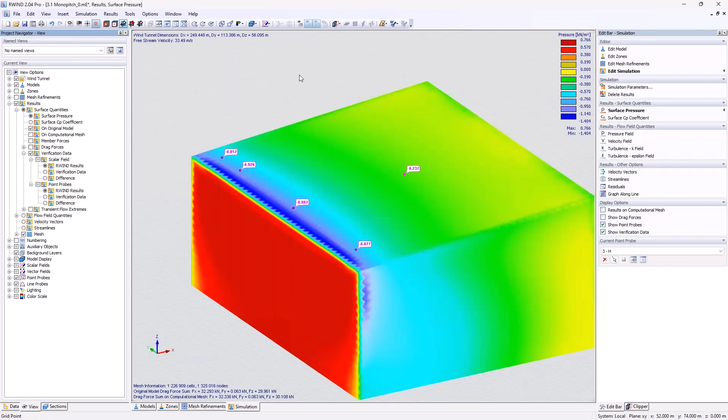This is the verification data, and now, drum roll, we can also check the difference. Let me quickly restrict our zones only to the roof. You can usually do that in the section tab. And then we can see that dark blue would most likely be a difference of 0, and the farther away we are, the bigger the difference. But of course, the standard does not really take into account a finer determination of an area. So we might have some bigger differences to the standard.

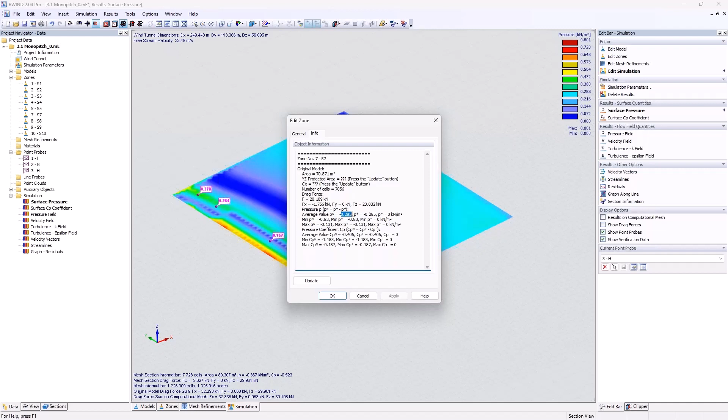What I did not do is a long calculation. What I did is use the recommended wind tunnel size, but only a model simplification factor of 2. So this is not the calculation giving the best results, but some quick results. And we can see that we are, of course, away from the standard in certain areas, but you could also double click on a zone. So let's, for example, use zone number 7 and get information about the average values inside the zone in order to double check them as well and compare them to the standard.

So this is most likely the biggest new feature we introduced for you in order to compare results with experimental data. What you could, of course, also do is enter more probes, define more areas, and think about which verification interpolation you are going to choose.

So I was just about to jump into the point probes, but maybe my computer does not like it. Okay, so I was most likely even done with this. So let's continue with the presentation. I see I'm a bit ahead in time, but I think this is no problem.

So last but not least, the prospect of today. We, of course, try to constantly expand our database of verification examples. If you do not know, you can find them in our download area. There is the verification example area where you can filter for RWIND and RWIND 2. And there we provide already some validation. For example, the latest one, validation and a comparison to a Japanese wind tunnel database, where you can see that also, of course, zones were created and double checked and compared to the standard.

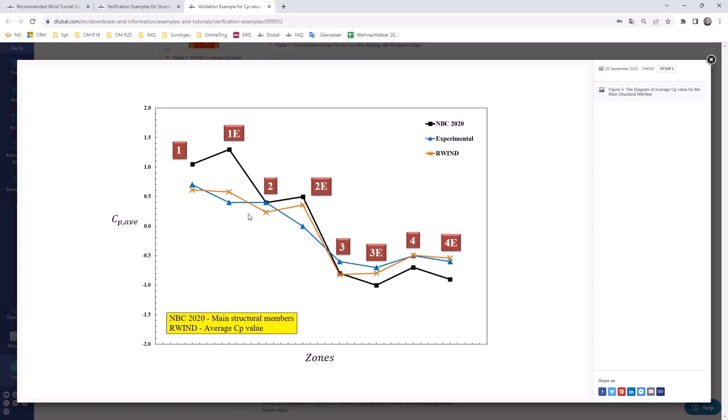Where is the experiment? Where is the standard? And where are we? So it's not about judging what is the correct result, I think, because nobody really knows what assumptions the standard really did in the past, but it's most likely just about getting a feeling: is my CFD model matching with the reality or not? And maybe I can even get lower values, which might be a bit more economical, but still on the safe side.

So you can find all the input values, and if you scroll down, there should also be the model to download. So you can already gather these models. Maybe if you have a similar model, put them into the tunnel with the settings we did, let them run, and then gather the information you may be curious about.

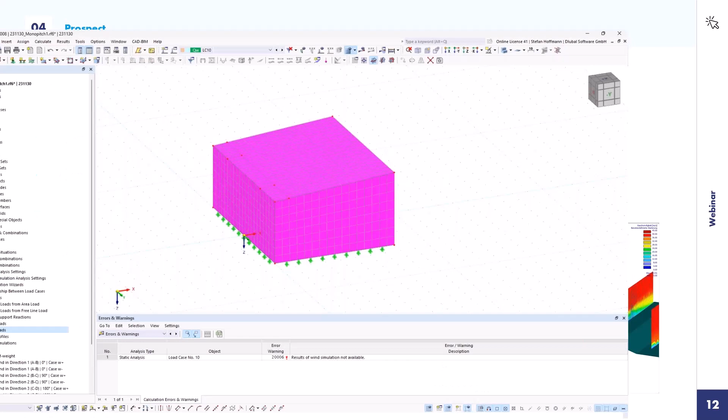What I did not show this time in the webinar is the connection of the results from RWIND to the RFEM GUI. What we are going to introduce more is that you can run RWIND as a solver in the background. There is a tab then in here, if you are in the wind analysis load case, that you can switch to the RWIND results. Currently, I think it's only the pressure and the Cp coefficient being drawn in over here in order to be evaluated.

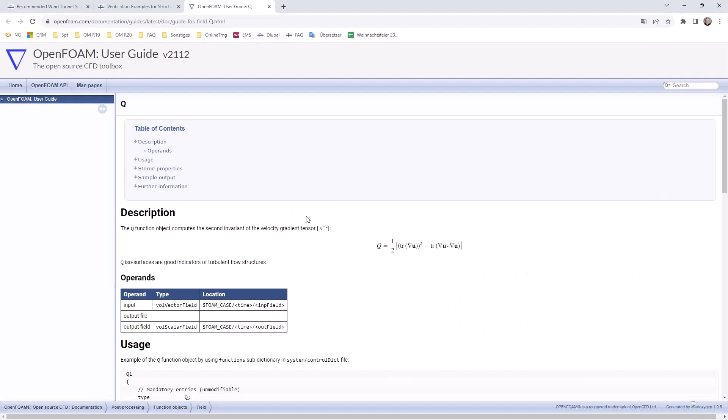We also plan, that's not fixed, the expansion of the result values as Q-ISO surfaces. I never heard about them yet, but I'm not that scientific CFD analyst. You can find in the OpenFOAM user guide information what this scalar field is about, and if this is useful for you to evaluate your model, you can check out these results hopefully in an upcoming version. And last but not least, besides all other planned features, we are planning to offer more wind tunnel scaling options that can be transferred from the RFEM GUI to the RWIND GUI.